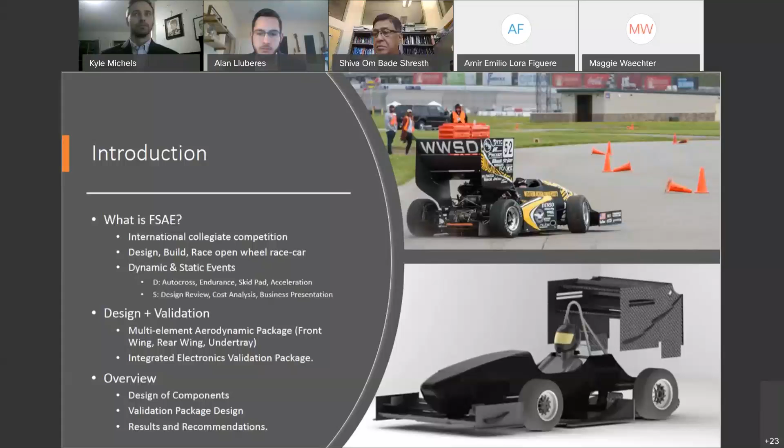The front wing of the BR21 FSAE vehicle is comprised of a multi-element wing in ground effect. The main plane of the front wing contains a structural section modeled after an FX74 mod airfoil spanning 15 inches in length. Beyond 15 inches past the center line of the vehicle, towards the outermost face of the front tires, the main plane splits into two elements, whose total chord length matches the structural section.

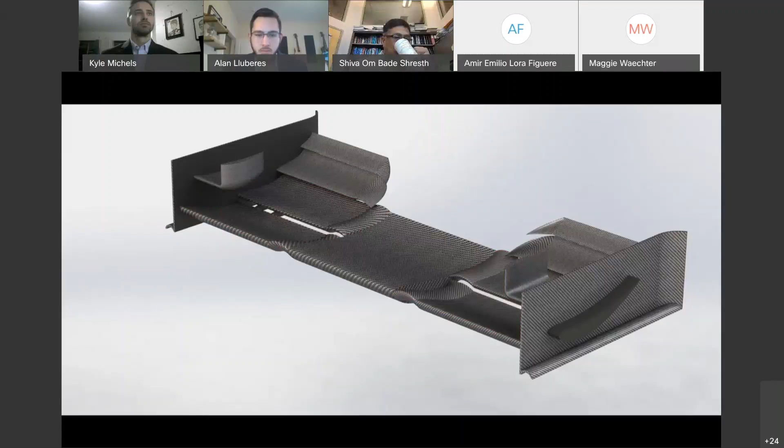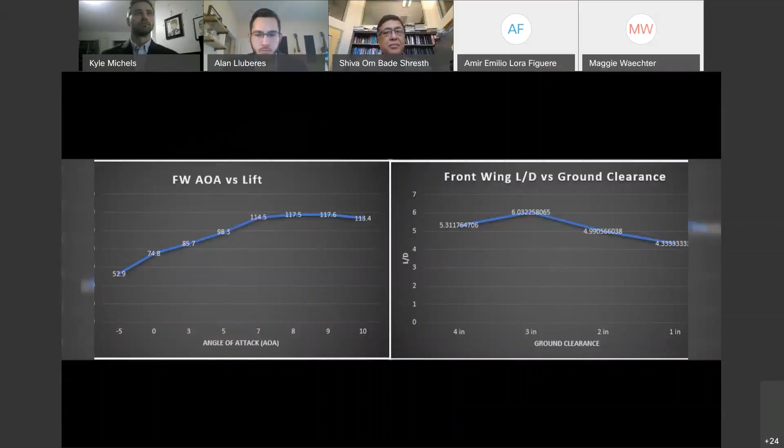These elements are placed at a negative angle of attack to maximize its relative location at maximum braking conditions. The front wing also contains a secondary element modeled after an Eppler E423 high-lift airfoil. The mounting location and angle relative to the ground plane were swept using CFD analysis to determine their optimum location during track conditions. The front wing's secondary purpose is to redirect the incoming free stream air to reduce the amount of drag produced by the vehicle's rotating wheels.

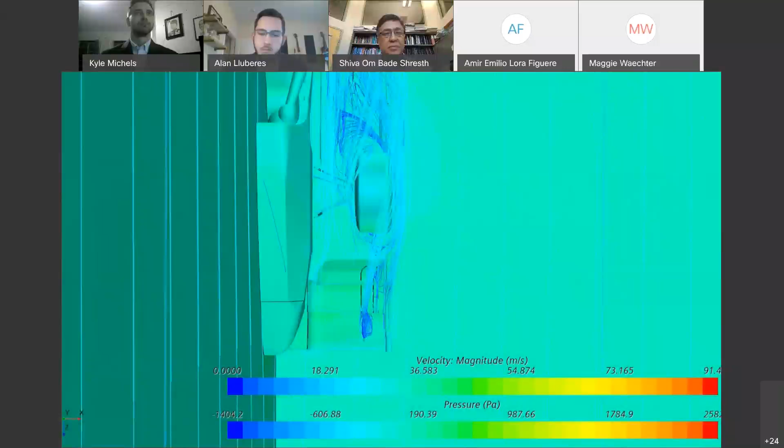In order to achieve this, the end plates, which also serve as a structural component of the front wing, contain a variety of features aimed at redirecting flow outboard of the front tires during track conditions, as you can see by the vertical structures highlighted in this image. For the same purpose, the front wing features underside strakes, which work in conjunction with the end plates to minimize the amount of drag created by the wheels.

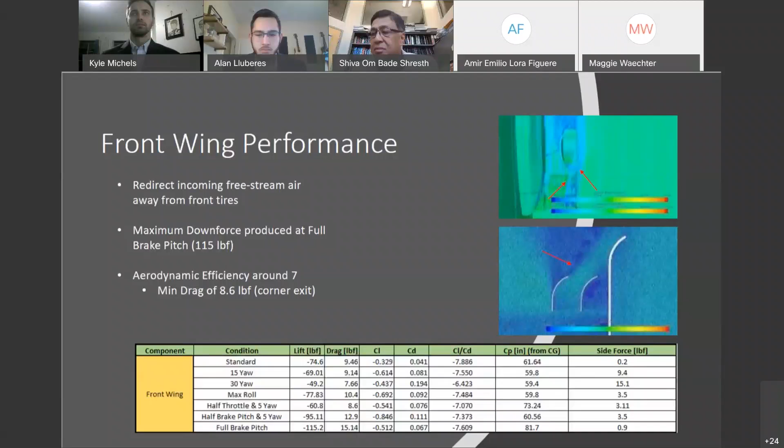The geometry of this system allows the front wing to produce a maximum of 115 pounds of downforce at full brake pitch. A minimum drag component of only 8.6 pounds allows the front wing to maintain an aerodynamic efficiency of up to 7.9. The results of these simulations, as well as their sensitivity to various track conditions, is summarized below. Please note all the simulation data presented was performed at 22.23 meters per second, or 50 miles an hour, as mandated by the FSAE competition spec sheets.

In order to balance the effects of the added downforce at the front, a multi-element rear wing was designed to the maximum allowed space. The three-element main section is modeled after the S1223 RTL high Reynolds airfoil and optimized for flow during track conditions to maintain balance of the car during maximum braking force.

In order to further condition the flow during corner entry, the main plane features a leading edge slat at the low pressure region of the wing. The end plate geometry is modified to maximize the aerodynamic efficiency of the wing.

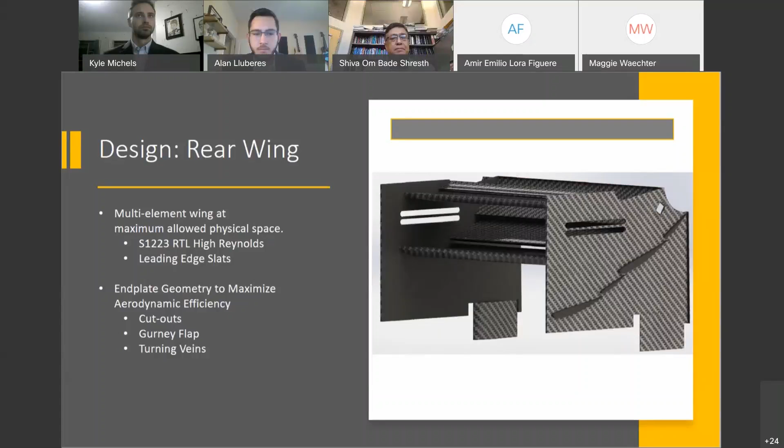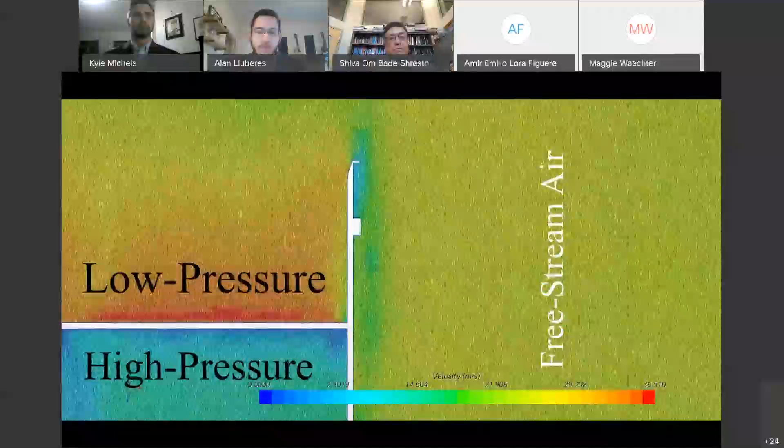Horizontal cutouts are located over the main plane to extract air from the high pressure region, to be further fed into the low pressure region as charged air via a secondary cutout, maximizing the aerodynamic efficiency. Additionally, the end plates contain a 5 mm vertical gurney to further aid the expansion of the wing,

increasing the pressure differential between both sides of the wing. Next is the undertray. The undertray design is comprised of four main aerodynamic elements: the main plane, venturi tunnels, rear tire deflectors, and end plate with vortex generator.

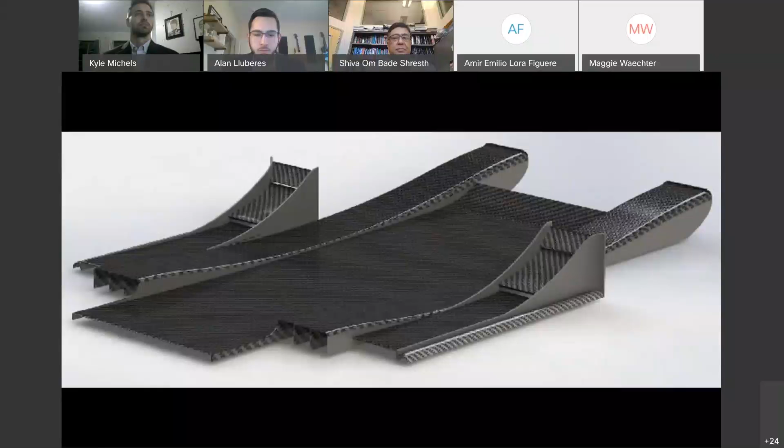The main plane, centered underneath the vehicle monocoque, is an inverted 2901 airfoil with 70-inch chord length at 1.8 degrees angle of attack. It's designed to account for the geometric constraints of the engine components mounted at the rear of the vehicle, as well as the rear jack bar mandated by the FSAE regulations.

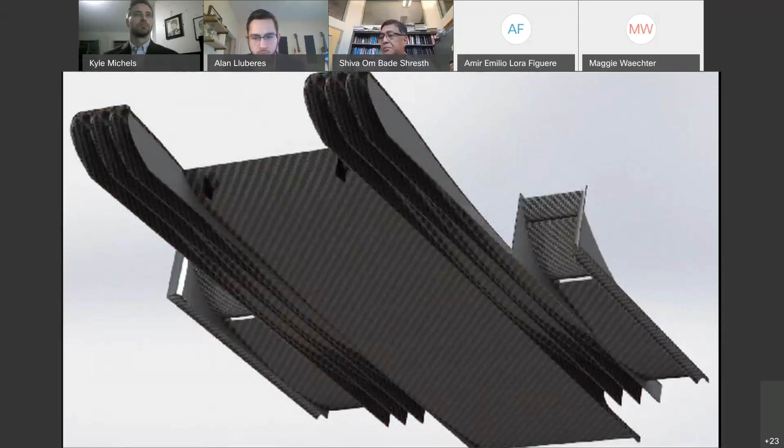The main plane is mounted by venturi tunnels on each side that span 7.5 inches in width. The venturi tunnels are set back 10 inches from the leading edge of the undertray to account for tire rotation, with 3 channels extending 70 inches towards the rear of the car.

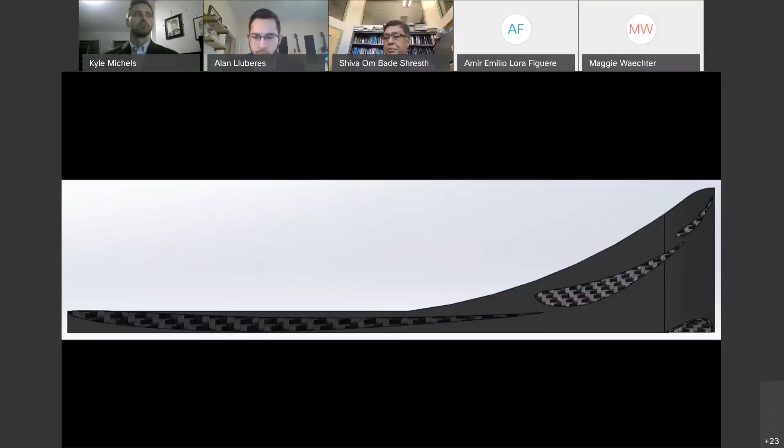The third undertray element is the rear tire deflectors, located in the aero development zone between the front and rear tires. This element is designed with 3 Eppler E423 high-lift airfoils oriented to redirect the turbulent air over the top of the rear tires, reducing the drag from the wheels and simultaneously providing additional downforce.

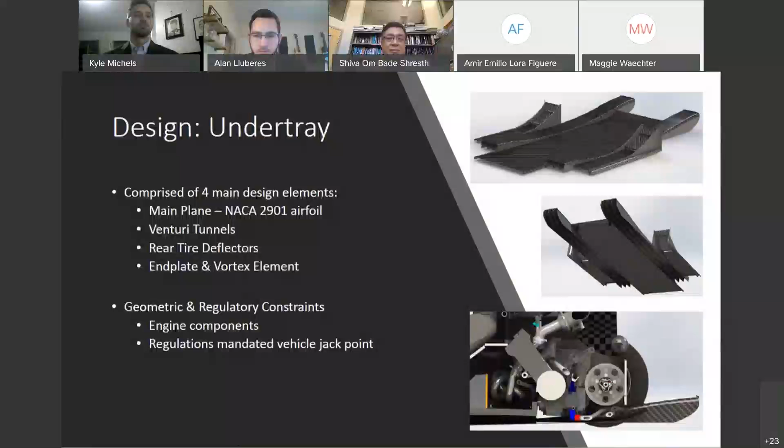The fourth and final element of the undertray is the end plate and vortex generator. This final element channels airflow around either side of the rear tire, helping to further reduce the total drag of the vehicle. The integrated foot plate creates a vortical structure sealing the underside of the car to prevent parasitic draw into the undertray, further increasing the aerodynamic efficiency of the component.

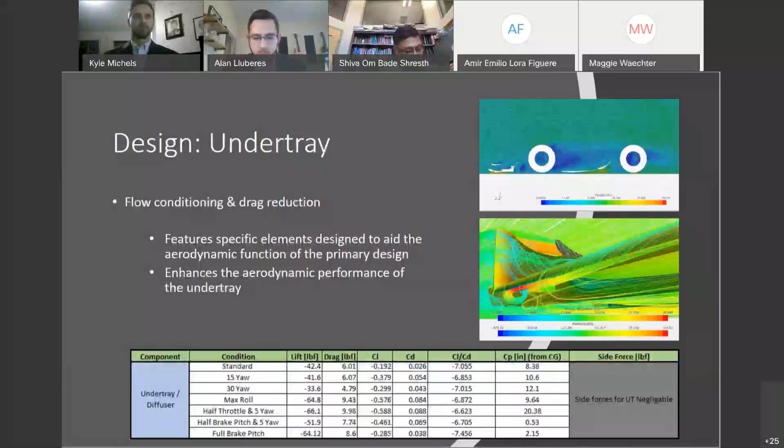The proposed undertray design achieves an aerodynamic efficiency of 7.055 at standard conditions, generating 42.4 pounds of downforce. Under half throttle application and 5 degrees yaw, the undertray produces a maximum downforce of 66.1 pounds, improving stability on corner exit. Similarly, at full brake pitch, the downforce increases from standard to 64.1 pounds, increasing handling under extreme braking loads. The proposed aerodynamic designs work in unison to improve the overall vehicle dynamics of the FSAE BR21 race car.

At standard conditions, the center of pressure rests at around 17% rearwards of the center of gravity, ensuring the vehicle is dynamically stable during on-track conditions, which allow the driver to extract the maximum performance from the vehicle. This concept has been proven on track by industry professionals in a realm of competitive automotive applications.

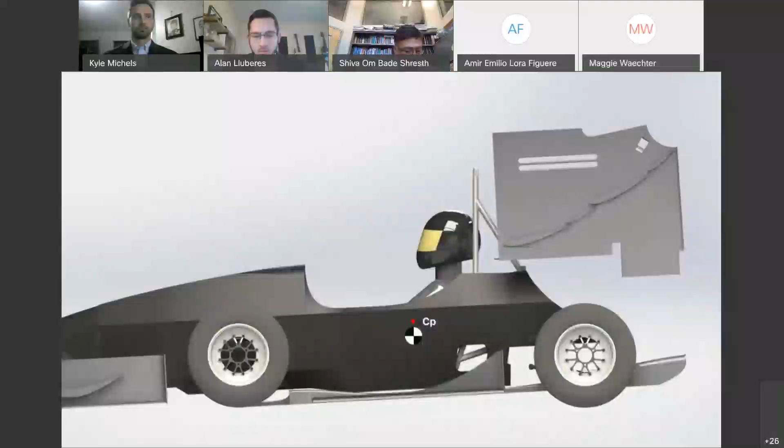Shifting the center of pressure rearwards of the center of gravity will counteract the effects of weight transfer during heavy braking conditions. At high braking loads, the center of pressure approximates the center of gravity, allowing the driver to maintain control predictably during corner entry.

At partial throttle application, the center of pressure shifts rearwards once again, around 10%, favoring the load on the rear axles, allowing for greater traction at the corner exit. Controlling the center of pressure position allows for predictable handling during weight transfer under braking and cornering conditions.

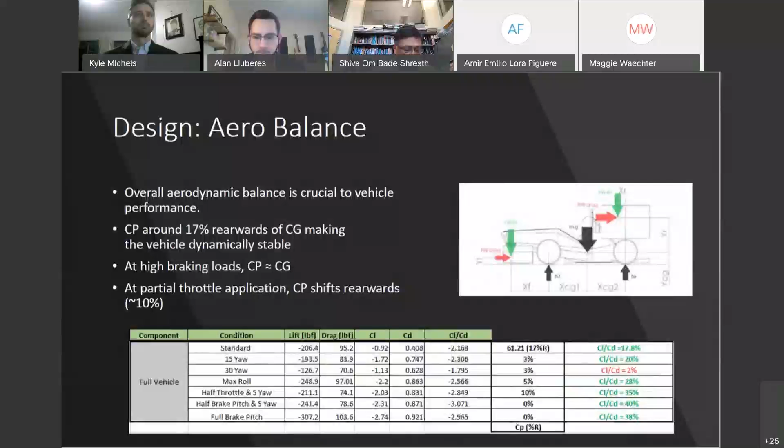The aerodynamic package designed by our team achieves an aerodynamic efficiency 17.8% greater than its predecessor. Under half brake pitch and 5 degrees of yaw, the improvements to aerodynamic efficiency increase to 40%. Positioning the center of pressure properly during specific on-track conditions can greatly influence the overall vehicle performance.

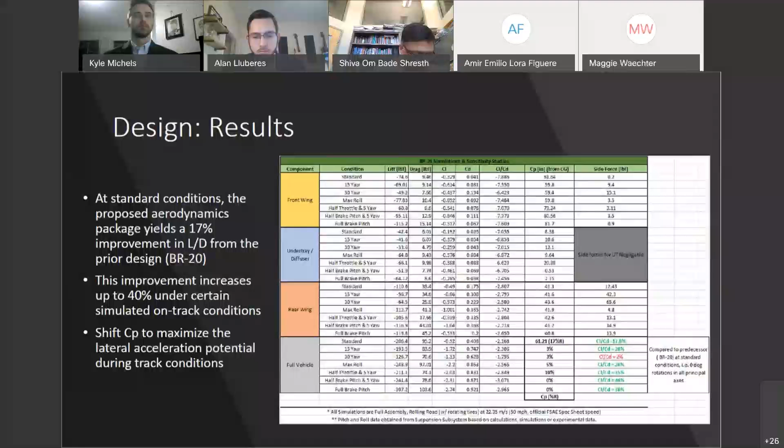These improvements made by the BR21 aero package correlate to higher lateral loads during cornering, which can result in improved lap times.

Let's now jump into the validation part of our project. Let's start by defining what strain gauges are.

Strain gauges are small instruments or sensors that change their resistance when forces are applied onto them. They're one of the most important and most useful sensors that use electrical measurements to find mechanical quantities. After the sensors receive their resistance change, that resistance change can be converted into different forces. For our case, we converted that resistance change into lift and drag forces.

For our particular purpose, we use small unidirectional strain load cells. They're located on the top right of the screen. You can see they're very small and very easy to handle.

Now, to ensure correct placement of these gauges, we perform a finite element analysis of each of the mounts. On the bottom left, we have the front wing mounts. In the center, we have the rear wing mounts. And on the bottom right, we have the undertray mounts.

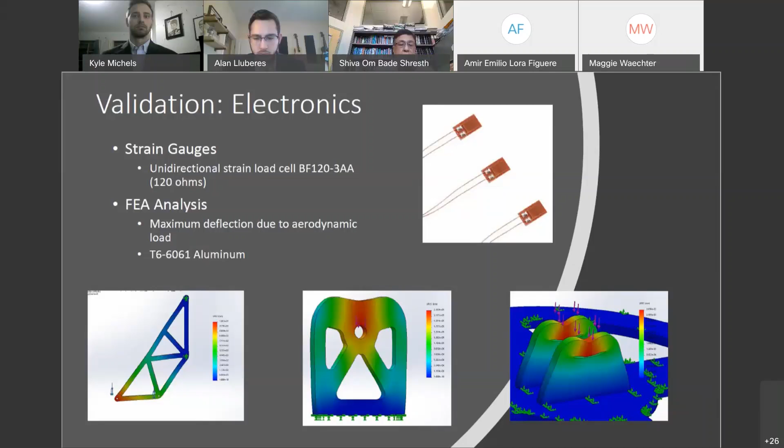In these pictures, we can see the respective strain distribution on each mount. That is the area where the strain gauge should be placed in order to get the most accurate data.

Now, as seen in the pictures below, we can see the final placement and location of the strain gauges. We use epoxy resin to attach the gauges into the mounts on the suggested locations. This allows the gauge to stick to the surface without adding any interference to the strain measurements.

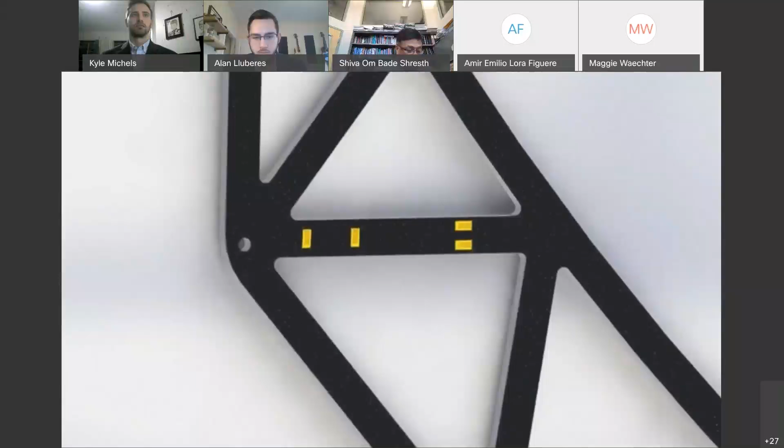There were some limitations though. For example, in the bottom left, we have the front wing mounts. The strain gauges were mounted in a different member than the FEA study showed. We did this because we wanted to attach the strain gauges in an area where environmental factors, like wind or little rocks, wouldn't affect them. So we put them in this member that is covered by the monocoque.

For the case of the undertray, seen in the bottom right, it was a geometrical constraint. It's a very small mount where you can only attach lift measurements.

Now, after the strain gauges are fixed into the mounts, it is necessary to calibrate the hardware for data interpretation. The calibration is a process of extreme importance, since this is what will allow the sensor to record and display the most accurate values. We can see the calibration curve located on the top right of the slide, where it's a pretty straight line, and that's exactly what we're looking for.

The calibration factor for these sensors was determined by the slope of that trend line associated with the input-output response of the system. In order to get this calibration factor, an assortment of different static loads was used to create a matrix comparing the load applied and the output voltage of the system. This process is repeated in both vertical and horizontal directions to account for lift and drag measurements respectively.

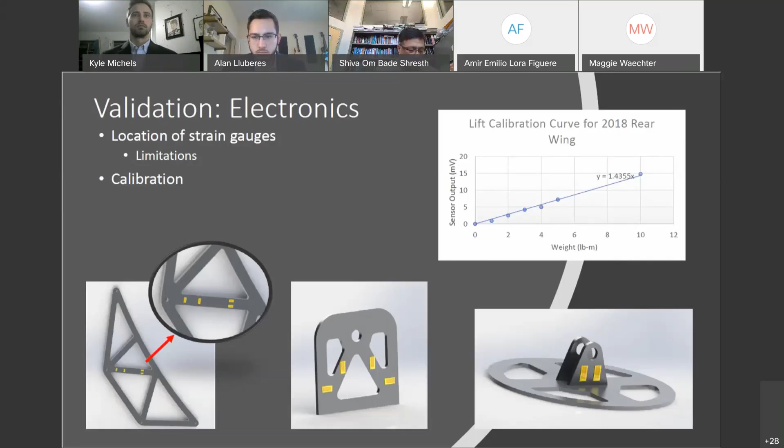The telemetry side of the validation portion of the project focuses on the wiring, microcontroller, and compiler. The strain gauges are wired together in a full bridge configuration, also known as a Wheatstone bridge. In this configuration, there are 4 active strain gauges per full bridge configuration. Each mount has a set of strain gauges configured to measure lift and a set to measure drag.

In order to measure lift, the 4 strain gauges that are configured together need to be in a vertical position. In order to measure drag, the 4 strain gauges that are configured together need to be in a horizontal orientation.

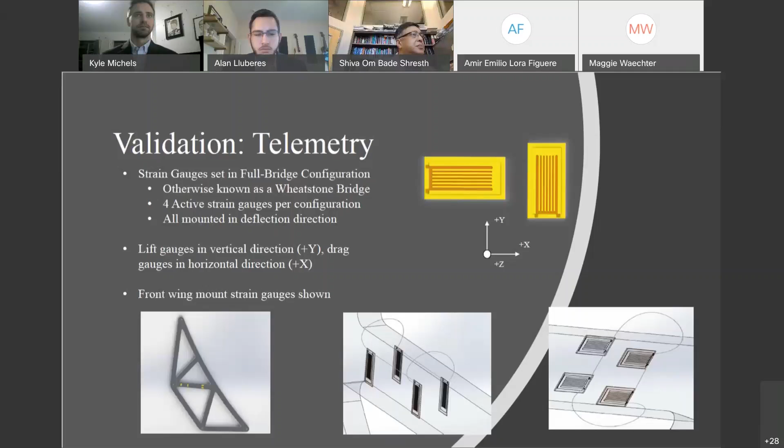The bottom 3 figures are of the front wing mount. The middle photo shows the strain gauges in a vertical position, therefore measuring the strain due to lift on the wing. The thin lines that are present show how the strain gauges are wired together. The picture on the right shows the strain gauges in a horizontal orientation, therefore measuring the strain due to drag on the wing.

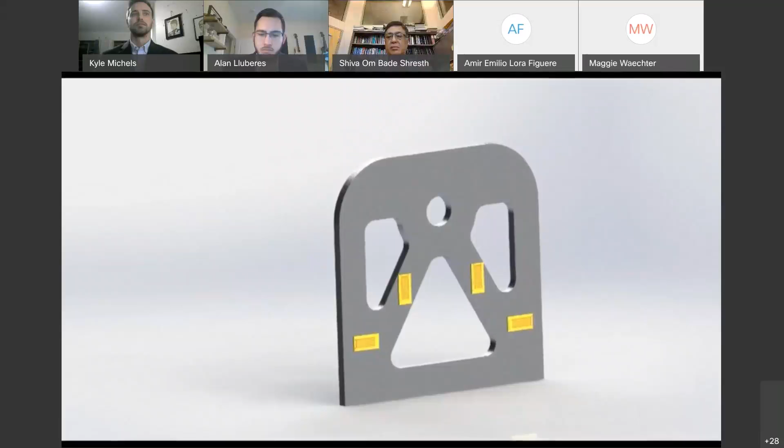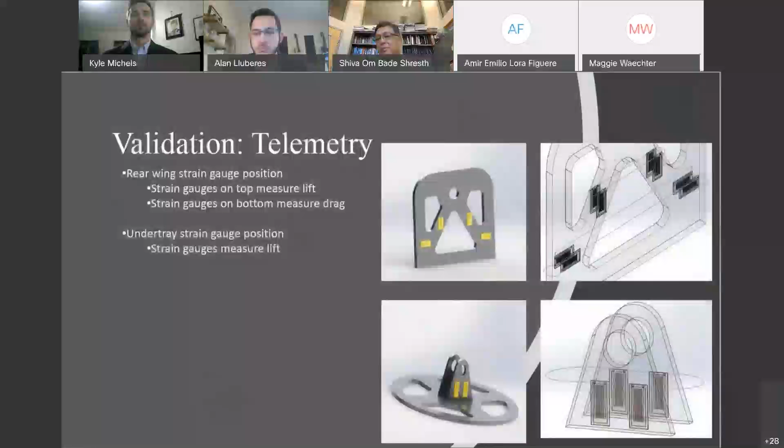To the bottom right of the slide, you will see the undertray mount. The strain gauges are placed in a vertical position, and the second photo shows how they are wired together in order to measure lift on the undertray.

From here, the strain gauges are wired to an amplifier. This is so the output values of the strain gauges have a more expanded range, so that the data analyzed can be more reliable. The amplifiers are connected to the circuit board, which also has the microcontroller connected to it, and the amplifiers are also connected to the microcontroller itself.

The microcontroller is then hooked up to the computer and the corresponding computer program. For example, when we were doing the calibration, we used an Arduino board which talks to the corresponding Arduino program. Or you can also hook up the microcontroller directly to the vehicle's ECU while on-track testing.

If the microcontroller is hooked up to a computer program, it will typically allow you to analyze the data either in a table or by a graph, and depending on the program, the data can also be viewed live.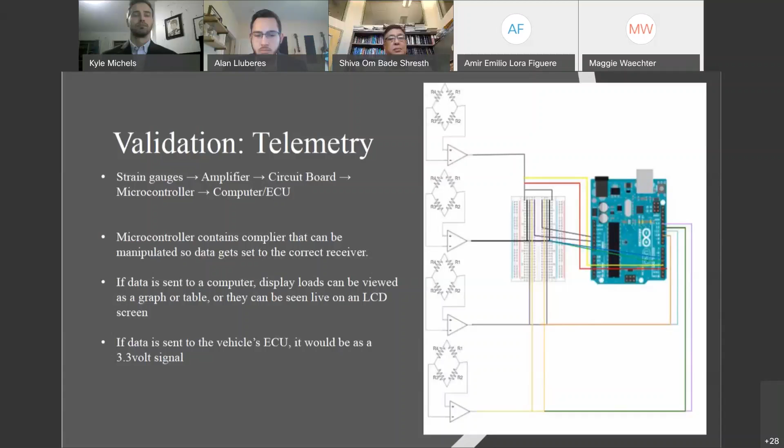The microcontroller contains a compiler, and within the compiler, users can manipulate where the data goes and how it is read based on the code that is written. In this case, if data is sent to the computer, it can be viewed as loads in a table or graph, or viewed live on an LCD screen. However, if the data was sent to the vehicle's ECU, it would be as a 3.3 volt signal.

Using the design techniques mentioned throughout the presentation, our proposed aero package presents a 17% improvement in aerodynamic efficiency over its predecessor, the VR20. The vehicle is also able to produce up to 300 pounds of downforce, with a 40% aero efficiency improvement over previous models.

This allows us to maintain a center of pressure located 17% rearward of the center of gravity, providing stability at high speeds and counteracting the effects of weight transfer through critical sectors of the track.

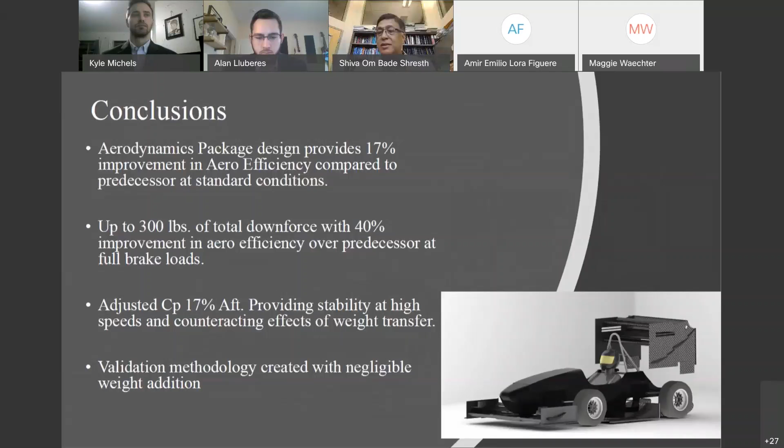Lastly, we were able to create a validation system to quantify the performance of our package with just a minor weight addition. The image shown below is a full render of our proposed aerodynamic package.

Because of the scope and limitations we had over the course of this project, we have some recommendations for the future. First, we would suggest a validation process for the effects of the high Reynolds flow from the CFD analysis, gathering data through experimental testing of pressure transducers in different areas of the vehicle.

Second, we would recommend the use of a multi-axial load cell. This would allow for more accurate data to be obtained by reducing the amount of noise from unwanted vibrations and interference due to the bending of the structural members.

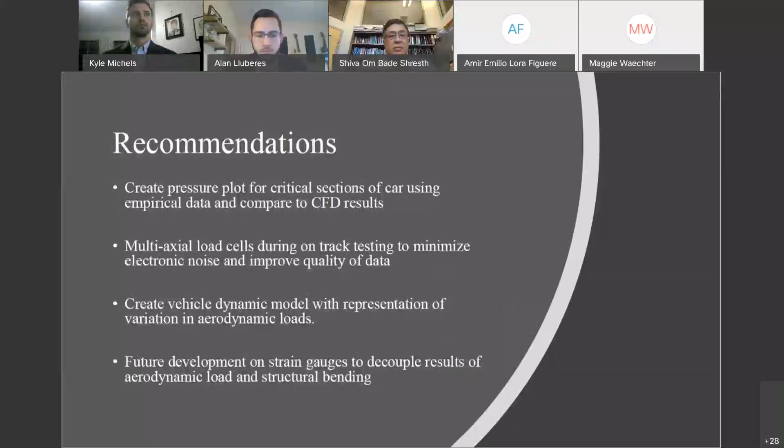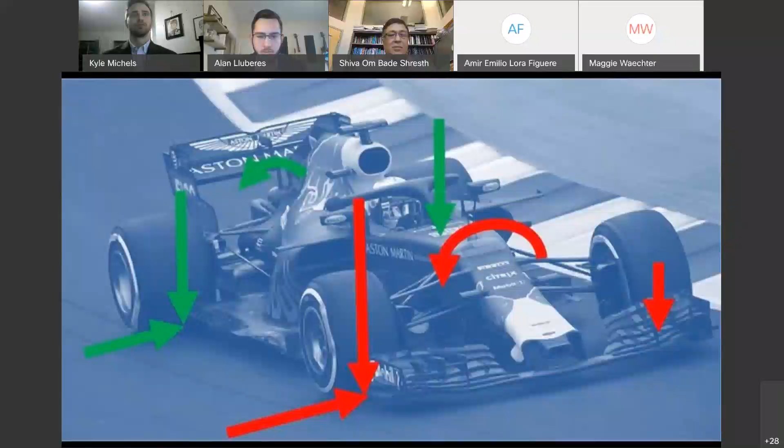Lastly, it's recommended to develop the potential of the vehicle's ride by creating a dynamic model of the vehicle in software that would allow you to take into consideration weight transfer and aerodynamic load changes depending on speed and track position.